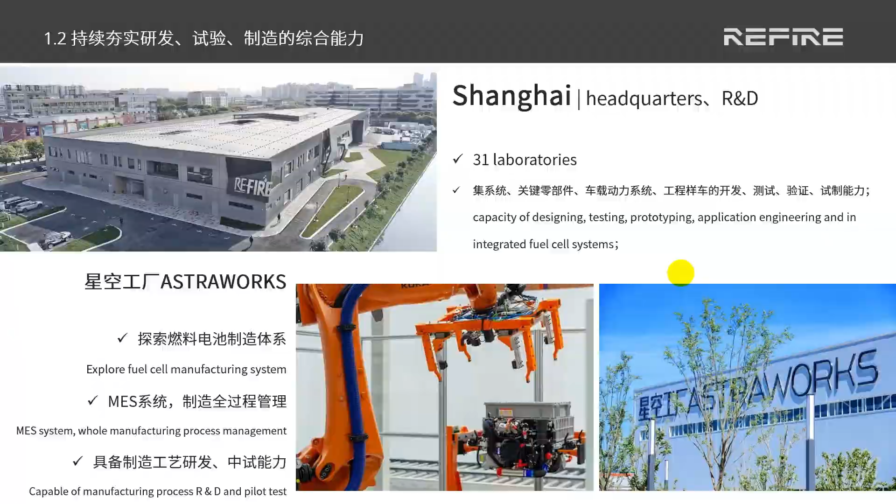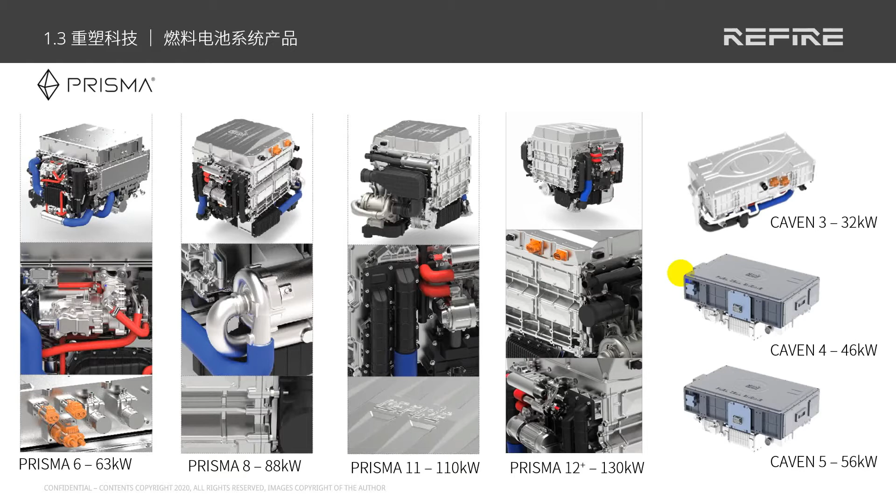At present, the company has 2 product series, CAVEN and Prisma. CAVEN series is the first generation products with power coverage from 30 to 56 kilowatts, and Prisma is the second generation products with power coverage from 60 to 130 kilowatts. CAVEN series is a sub-module design which is divided into stack module, air compressor module, DC module.

Through the new mechanical architecture design and the component design of parts, Prisma series products have broken through the core technology such as mounting design of air compressor, and direct connection between stack and DC-DC. A functional integration between the end plate of the stack and the core components completes the integrated design of the fuel cell power system and improves the ease of system layout and electrical safety.

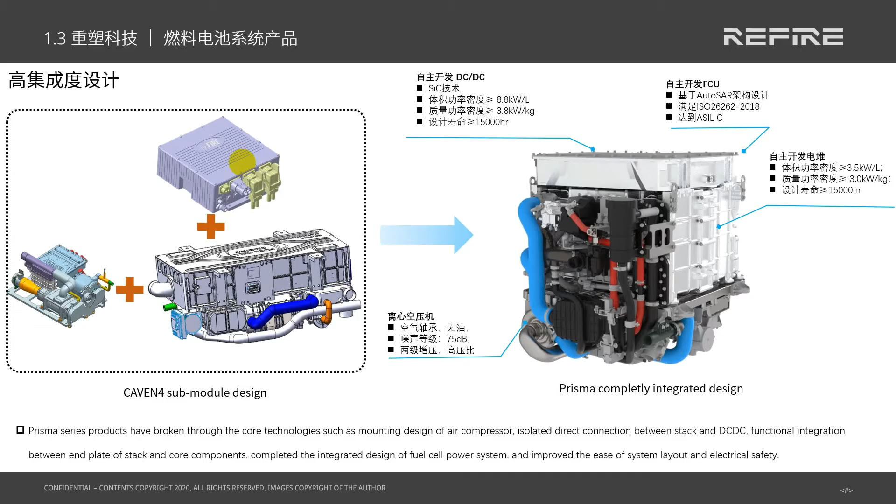In the Pearl River Delta region, more than 1,200 fuel cell vehicles have been put into operation with buses and logistical vehicles equipped with REFIRE fuel cell systems. By the end of November 2020, they have driven more than 10 million kilometers and achieved a better customer experience than traditional buses and logistical vehicles. In addition, in Guangzhou, we also support the customer to complete various fuel cell municipal sanitation vehicles, becoming the first batch of fuel cell sanitation vehicles in China to enter the test and use stage.

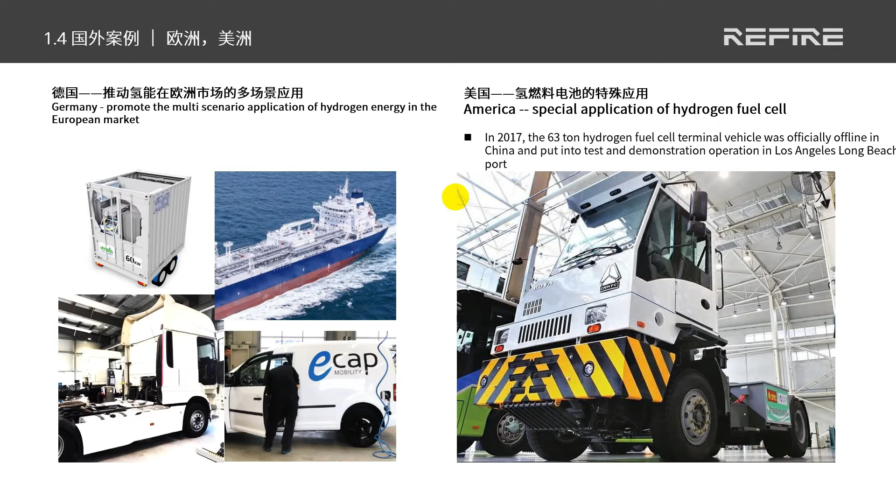In Asia, the 7.5-ton fuel cell logistical vehicle co-operated with Fuso was unveiled for the first time at the 46th Tokyo Auto Show in 2019. In 2019, the first batch of 9-meter fuel cell buses were delivered to Malaysia for local operation. In Europe, we cooperate with Germany's ECAP to promote the multi-scenario application of hydrogen energy. In the United States, the fuel cell heavy truck we cooperate with FAW was put into test and demonstration in Los Angeles Long Beach Port. I will play a video to give you a more intuitive understanding of our company and working environment.

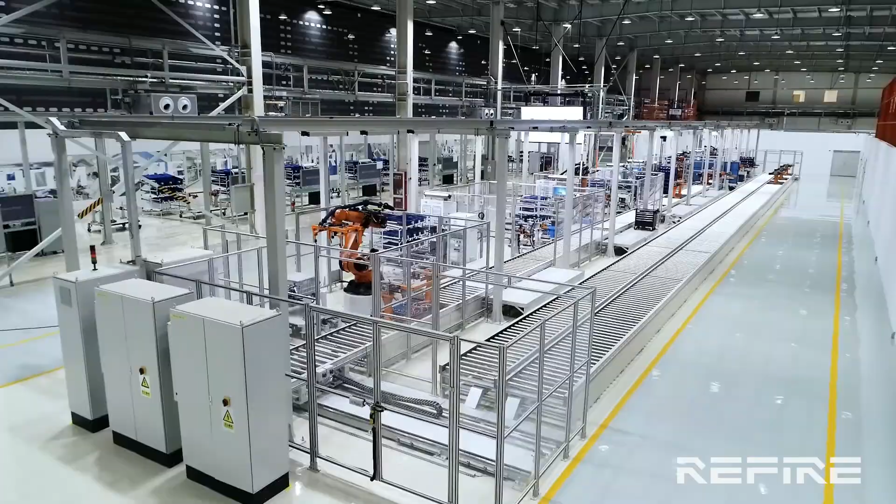Now the second part, construction and application of big data platform. Our big data platform is divided into data management layer and business application layer. In the data management layer, firstly, the original data warehouse is established by collecting development data, production line data, and vehicle operation data. Then we will establish an available data warehouse through data filtering. After data mining, it becomes high-value data, so as to support the iterative development of products, quality tracing ability in the whole life cycle, after-sale maintenance, and future services.

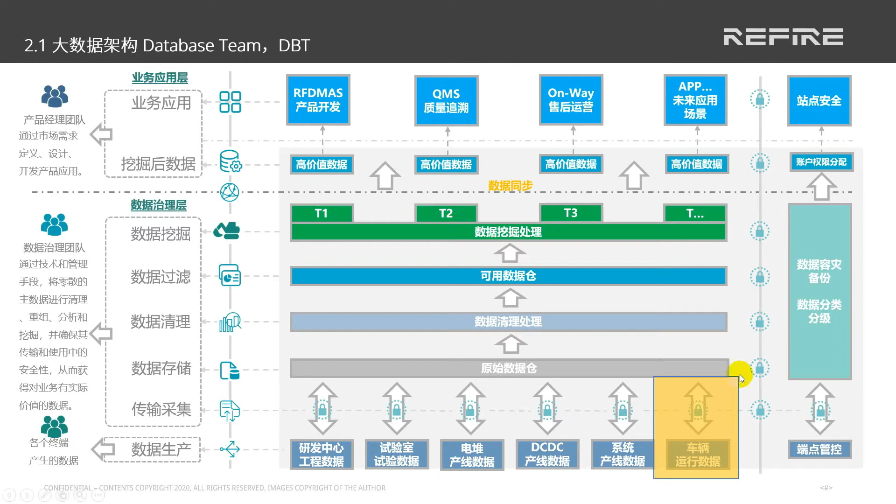Today, we will focus on the vehicle operation data as an example to introduce our work. In the process of vehicle operation, we will collect more than 800 kinds of signals, such as environmental, powertrain, and fueling information, and then optimize the fuel economy and durability of the vehicle through data filtering, visualization, and data mining, and improve the reliability of products through fault diagnosis.

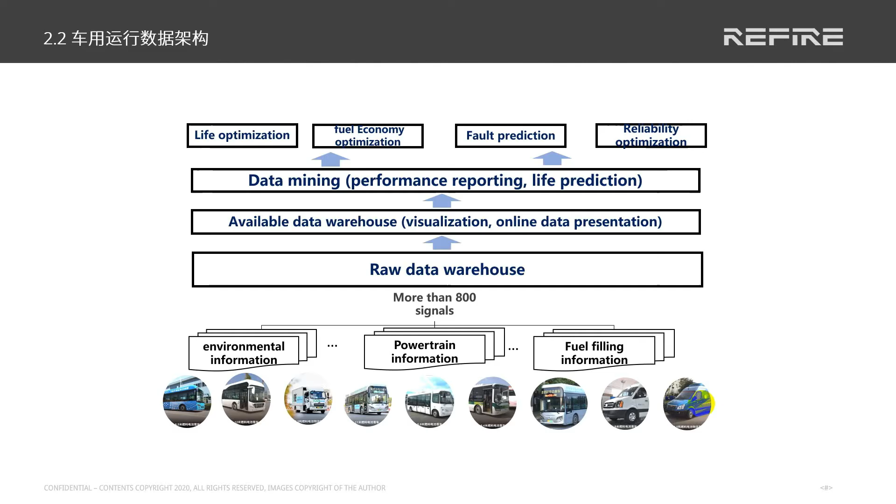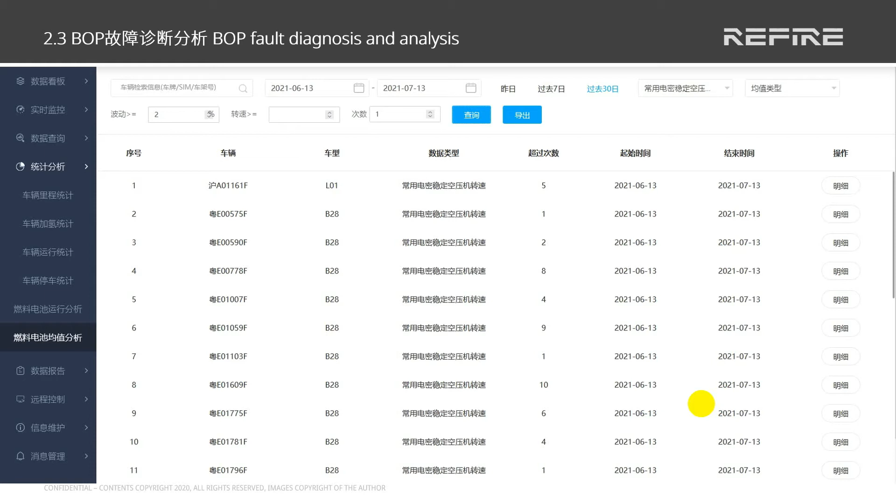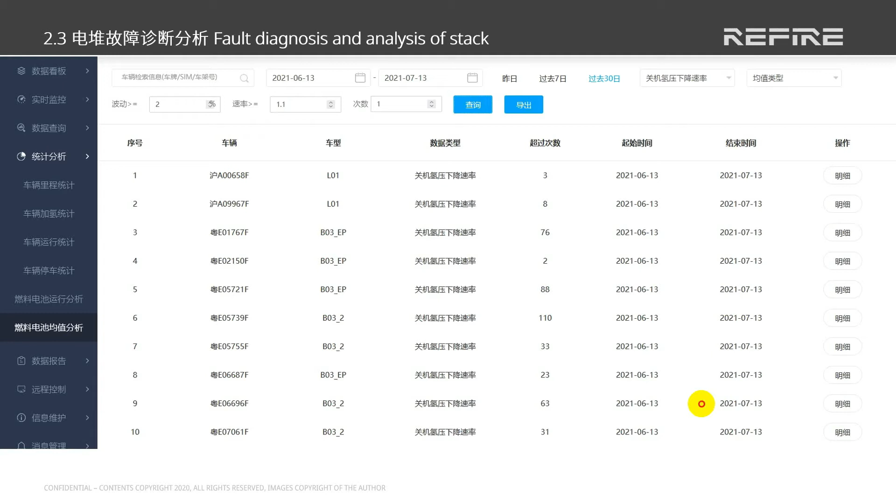Through probability statistics and mechanism analysis, we can also assess the health state of our stack and give early warning in advance. We can also make real-time statistics and alarms of hydrogen leak information. In addition, our data platform can support R&D engineers to provide online remote assistance to after-sale engineers.

We also realize data interaction based on cloud data. We can refresh the software of the system so as to timely solve system problems or better adapt it to changes in the environment and maintain the optimal states of the vehicle and the system.

Now the third part, fuel cell system fault diagnosis and early warning based on big data. In the active operation of fuel cell vehicles, there are many problems such as single vehicle information island and many fuel cell fault dimensions, which lead to high difficulty of fault diagnosis. Therefore, it is necessary to carry out fault diagnosis through cloud platform cross-spatial scale comparison, principal component analysis, and other methods of fault feature vectors.

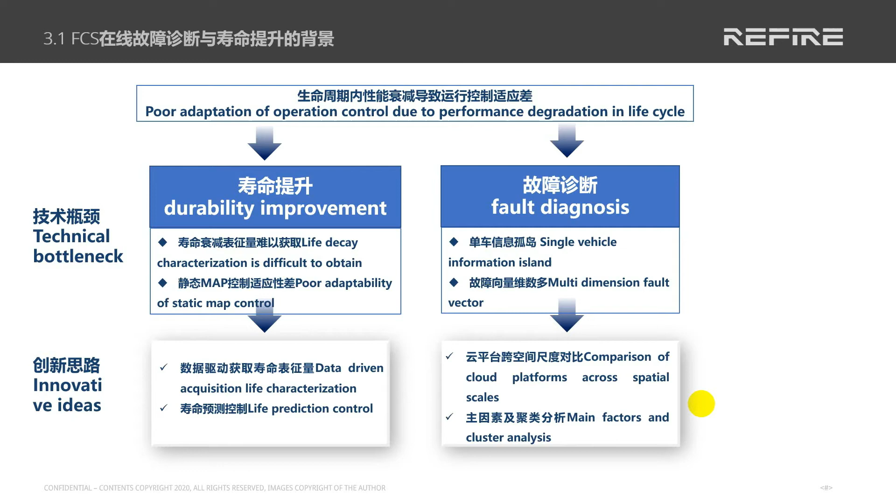Our fault diagnosis process is shown in the left figure. First, based on the data of offline parts, a static SVM model is established through processing. For the new sample sets, we process and then perform k-means clustering analysis and then run the adaptive SVM model to analyze and diagnose the real-time samples. Thus, a closed-loop online fault diagnosis method is formed.

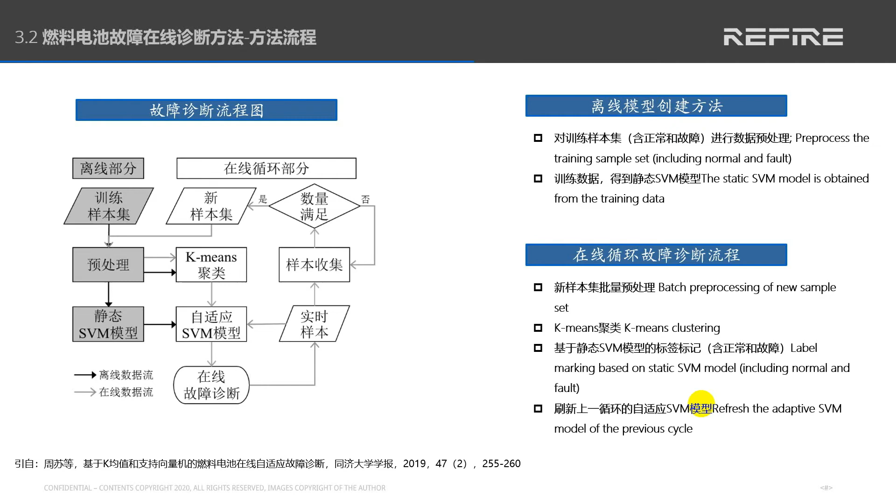In order to verify our method, we carry out simulation verification. Firstly, PCA pre-processing is carried out based on the existing voltage data in the library to obtain the dimension-reduced data set. And then the collected samples are labeled by k-means clustering; the accuracy is about 77.33%. Because all the newly collected samples are much fewer than the initial training samples and are only used to improve the original cluster rather than retraining, the error rate will not affect the final diagnosis accuracy of the model.

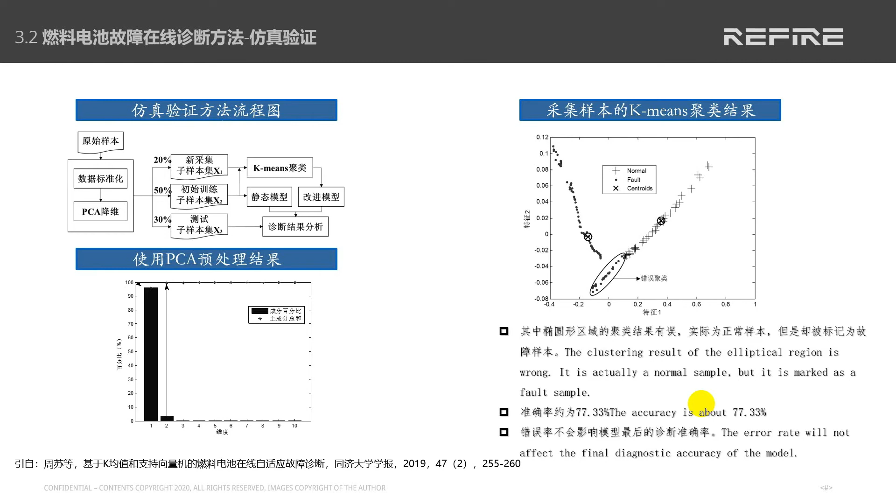Compared with the static classifier, the boundary of the dynamic classifier changes obviously. When the collected sample X1 is introduced, the number of support vectors in the model increases and the position and shape of the boundary change, so as to realize the dynamic update. Based on this, by identifying the new test subsample set X3, the diagnosis accuracy can improve from 98% to 99%, so as to realize adaptive adjustment of the diagnosis model and improve the fault diagnosis accuracy.

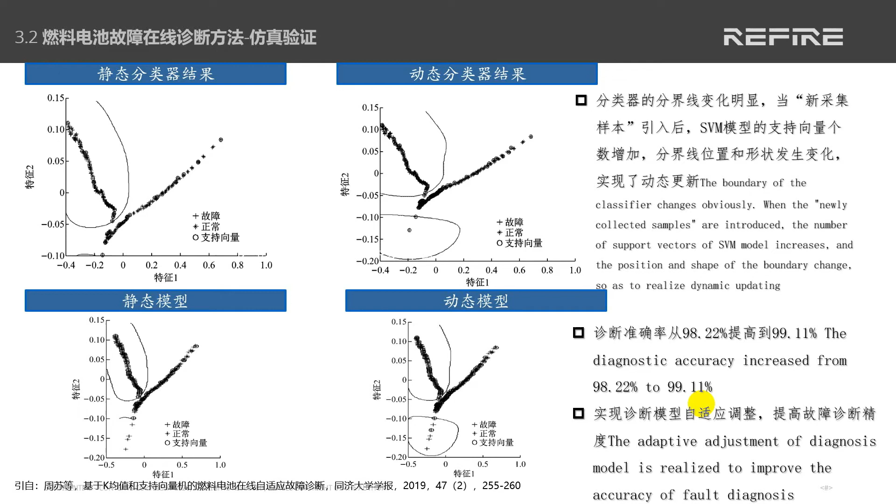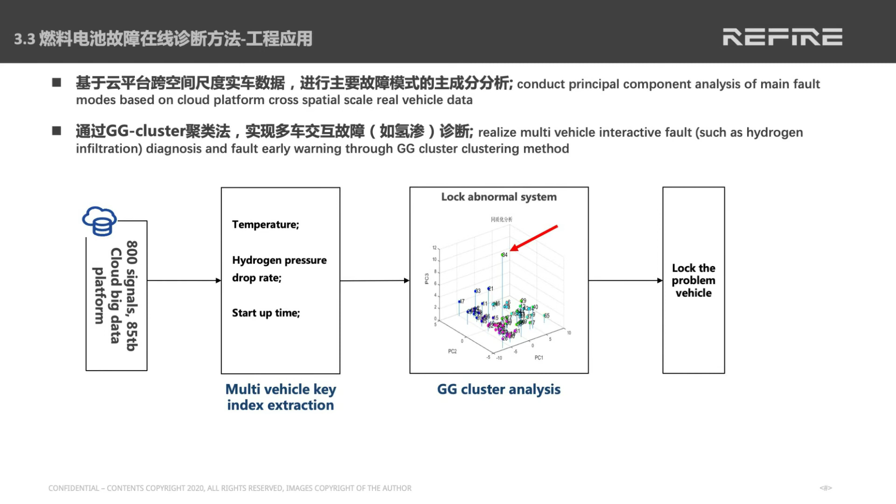In engineering application, we conduct principal component analysis of the main fault modes based on cloud platform cross-spatial scale real data, and realize multi-vehicle interactive fault diagnosis and early fault warning through the GG clustering method. In the past 3 years, the longest vehicle operation has exceeded 4,500 hours, breaking through the active operation mileage of 200,000 kilometers for the first time. Based on the working conditions, the actual life can reach more than 27,000 hours. According to the operating status and comparison of cloud platform data, the mileage between failures has been increased by more than 3 times.

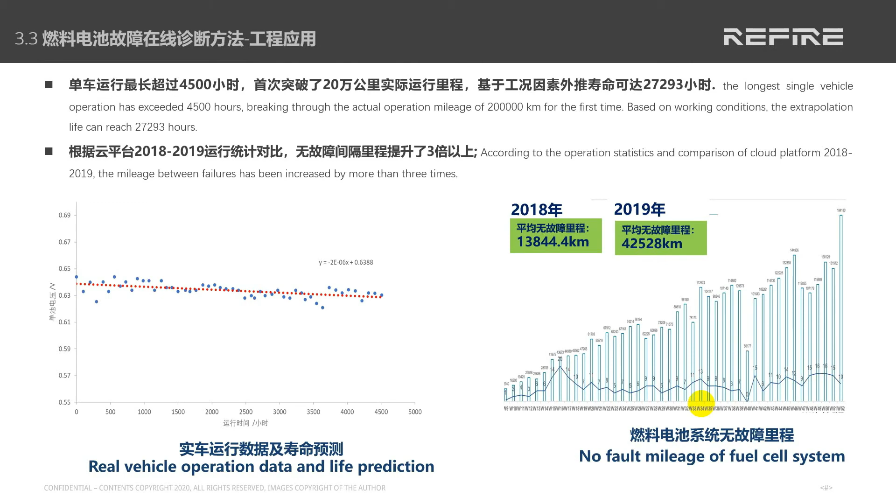At the end of July 2021, our fuel cell system has run more than 60 million kilometers in total, and the fault-free interval mileage of the system has been increased to 50,000 kilometers, improving the reliability of products year by year.

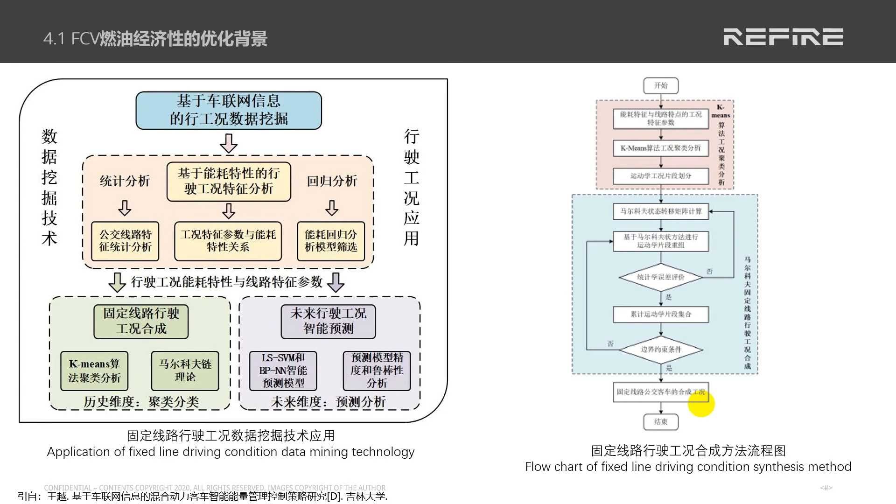The fourth part is development of a fuel cell economy improvement strategy based on big data. At present, due to limitations on infrastructure such as hydrogen fueling stations, fuel cell vehicles mostly run in the form of fixed routes, which reduces the difficulty of fuel cell economy optimization to a certain extent. However, in order to extract the actual working condition data, k-means and other methods need to be used for clustering analysis. We have completed the local optimal energy management strategy before. Now we are trying to carry out global management optimization.

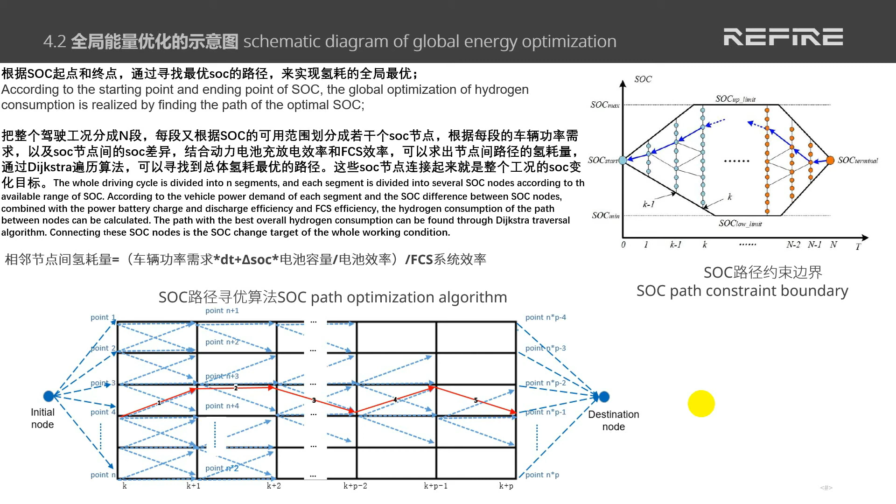According to the SOC starting point and end point, we can find the optimal SOC path to achieve global optimization of hydrogen consumption. Our simulation results show that for the working condition of a 31-ton dump truck, compared with the local optimized management method, hydrogen consumption can be reduced by more than 1% through global optimization. Next, the real vehicle will be verified.

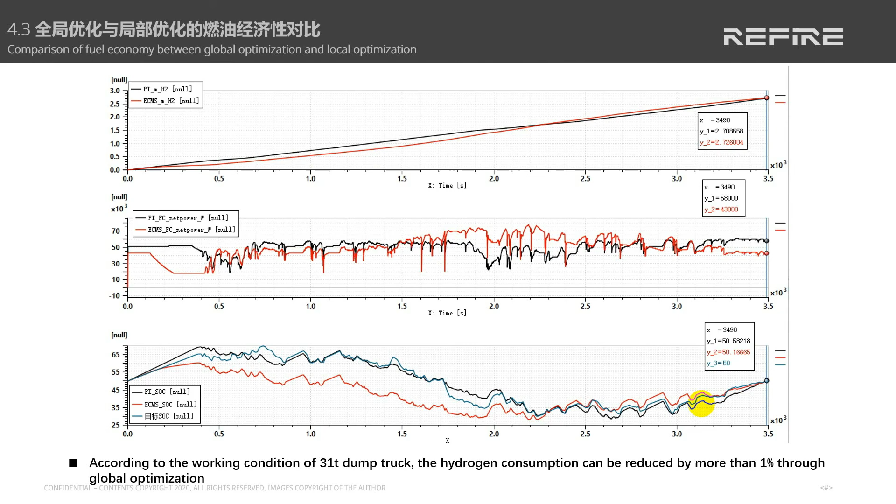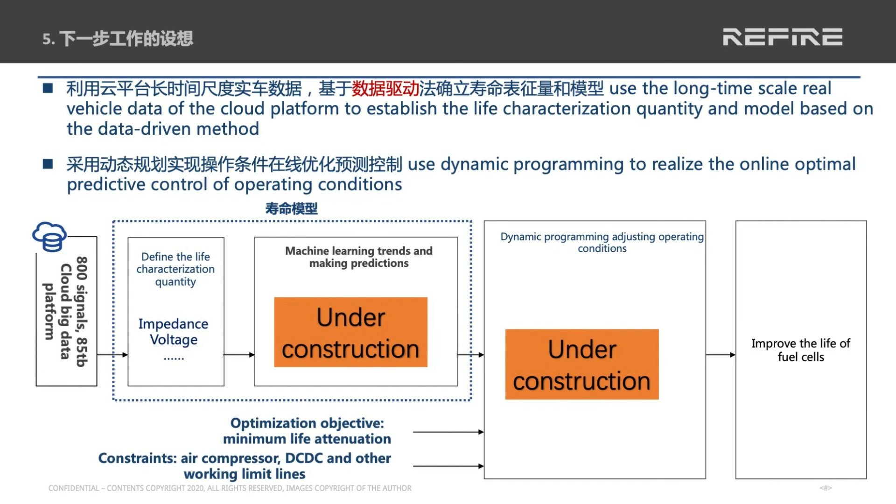The following is a summary. We have built a closed-loop data platform for the whole life cycle, from R&D and production to application. We can carry out research work such as fault diagnosis, life optimization, and fuel economy improvement based on this data platform. We are willing to work with interested research institutions or universities to conduct AI technology research based on the big data platform, improve product quality, and give full play to the value of data.